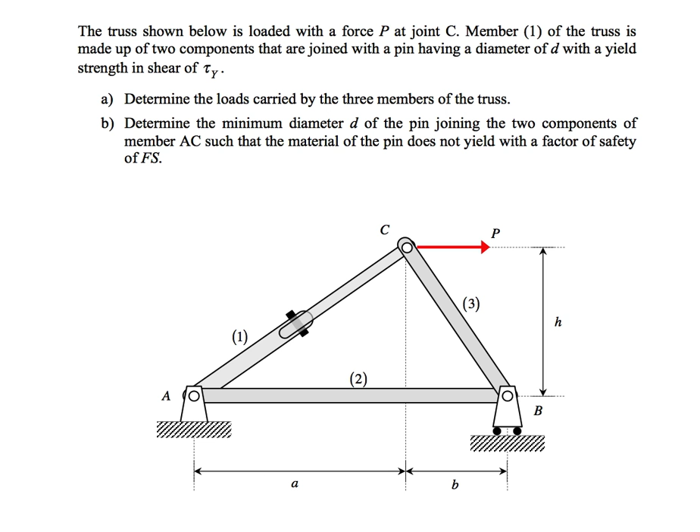And 2, we want to look at the minimum size of this pin D that holds together the two subsections of 1. And we want to size that in a way that with a factor of safety of Fs, this pin will not fail in shear in yielding. So again, we want to have a factor of safety against that failure.

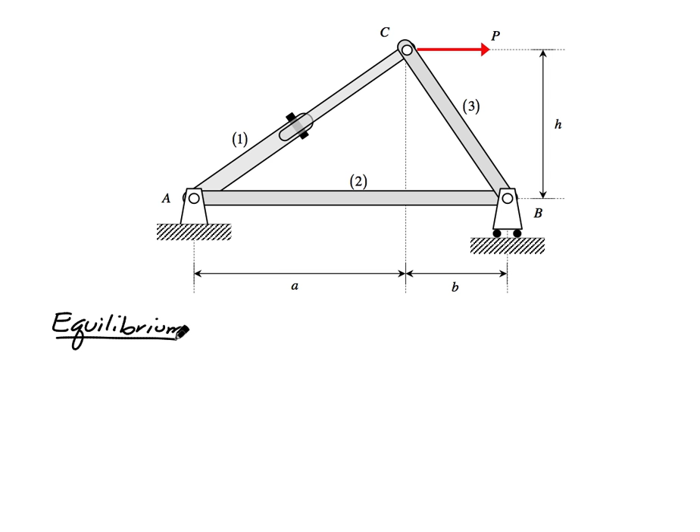So the first thing I'm going to do is look at equilibrium. And equilibrium here means I'm going to be looking at method of joints for joint C and joint B. The forces that I have acting on joint C is the applied force P. There is a force there, load F1. There's a load of F3. There's going to be a load exerted by member 2 on that pin, and there's going to be a roller support here, so there's going to be By.

So we can deal with trig. This angle phi. We'll say that phi is going to be given to us in terms of the dimensions of the problem. So that's going to be inverse tan of opposite, which is h, divided by adjacent, which is b. So that's known information. And how about this one here, theta? Theta is going to be also given by an inverse tan of h, in this case, over a. So again, these two angles we know from given information.

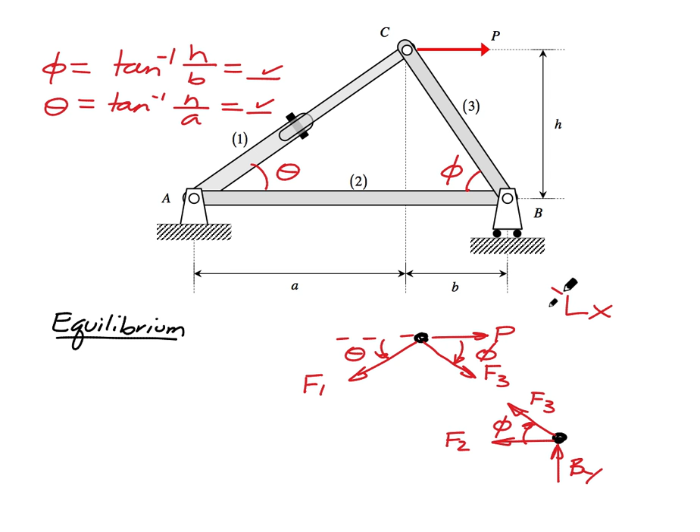This angle is theta. This angle is phi. Likewise for here. X is going to be positive to the right, Y is going to be positive up. So if I look at pin C, if I sum forces in Y first, I get minus F1 sine theta minus F3 sine phi. For equilibrium, that is 0. So I get that F3 is equal to minus sine theta divided by sine phi times F1.

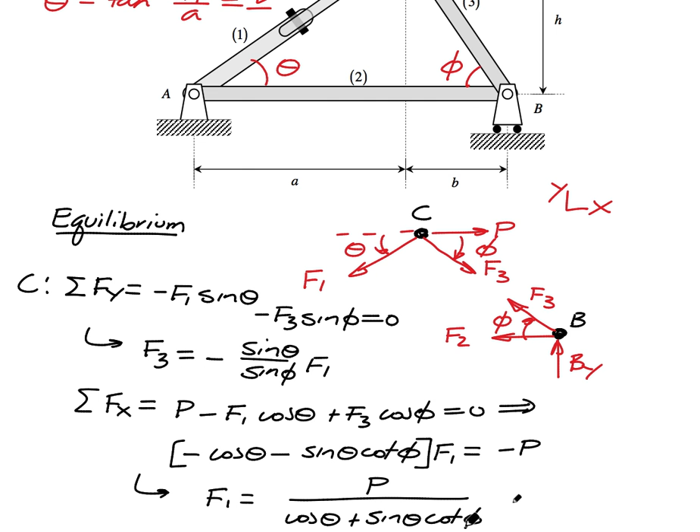Summing forces in X, I get minus F2, oops, I've jumped down to the wrong FBD. Let's stay with C here. Summing forces in X, I get P minus F1 cosine theta plus F3 cosine phi. For equilibrium, that resultant is 0. So what I'm going to have here is minus cosine theta minus sine theta cotangent phi times F1, and that's going to be equal to minus P. Making sure that I've got everything correct here. So it says then that the load carried by member 1 is going to be P divided by cosine theta plus sine theta cotangent phi. So this gives us the load carried by F1.

Also, therefore, from above, F3 is going to be minus sine theta divided by sine phi times F1, so that's times P divided by cosine theta plus sine theta cotangent phi, like that. So this will be F3. For what it's worth, F3 is in compression where F1 is in tension.

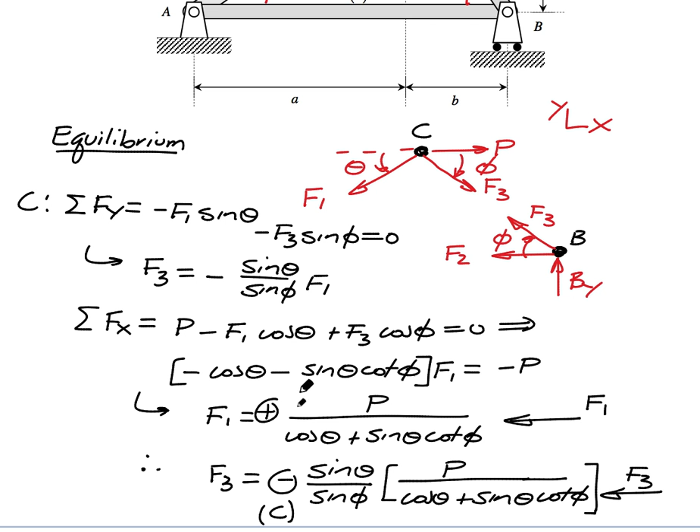From our free body diagram of B, when I sum forces in X, I'm going to get minus F2 minus F3 cosine phi, and therefore from this I get that F2 is going to be equal to minus F3 cosine phi, so that's going to be plus sine theta cotangent phi P divided by cosine theta plus sine theta cotangent phi. And so this answer here for F2 has a plus sign, so it means that that is in tension. Okay, so that gives us our loads carried by the members 1, 2, and 3.

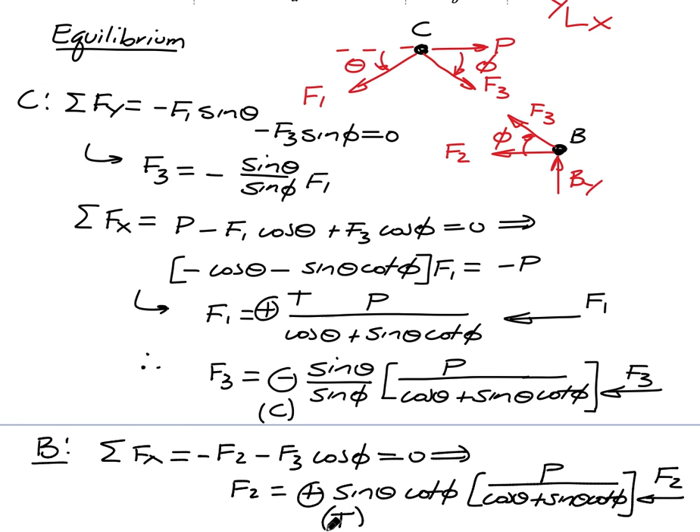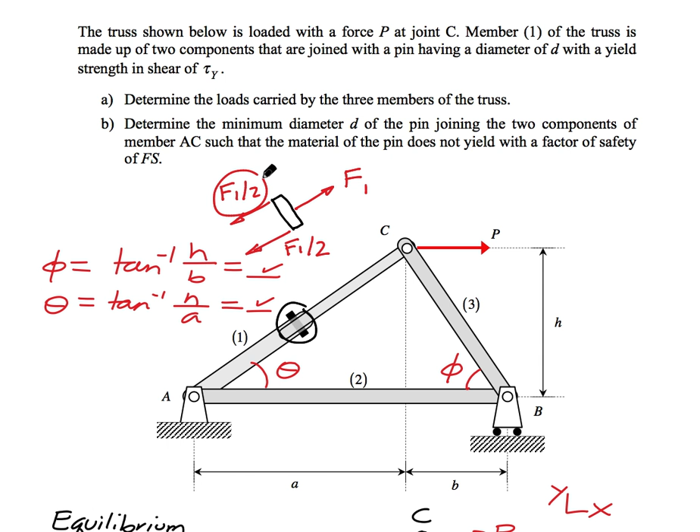Now we want to come up and look at the pin, this pin right here. And let me just make a sketch here. If I look at this pin, on this side we're going to have a double-sided connection. On this side we have a single. So this is going to be equal to F1, and then each one of these is half of that, F1. So what dictates the shear stress in the pin is the F1/2. That is, our shear stress is dictated by this because it's supported by 2 points.

So when I scroll down here, the shear stress in the pin is going to be the shear force divided by pi r squared, so that's pi times d over 2 squared. V in this case is F1 divided by 2. That gets multiplied by 4 coming from the bottom there, pi d squared, like that. So that's the shear stress we have in the pin. Let's take it one more step. That's 2F1 divided by pi d squared.

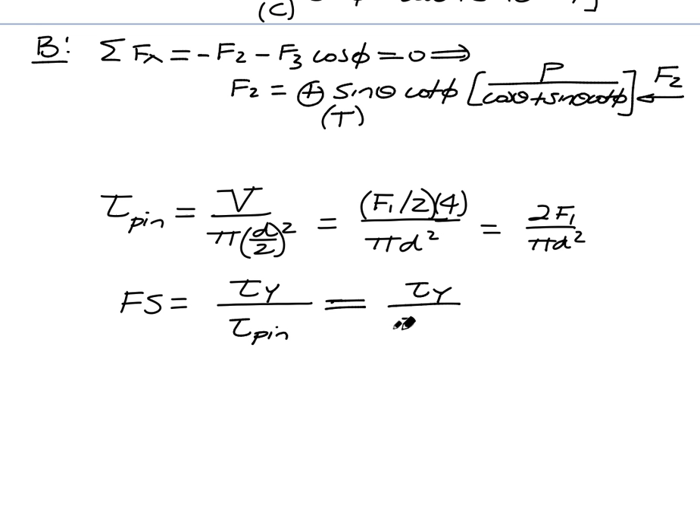We know from our factor of safety equation that that's going to be the shear stress that we're going to design against. So that's tau yielding compared to the stress that we actually have, tau pin. So that's equal to tau yielding divided by 2F1 divided by pi d squared. So let me take a couple more steps here. Pi tau y d squared divided by 2F1.

So the minimum d that we'll have for that factor of safety that's given is going to be the square root of 2 times F1 times factor of safety, divided by pi tau y. So that's the minimum diameter pin that we can have.

The first part of this is very basic stuff, what you have done before in other courses. Find the load carried by each member in the truss. I use the method of joints. But here we're given that member one is actually two members that are spliced together, held together with this pin, and it's a double-sided connection.

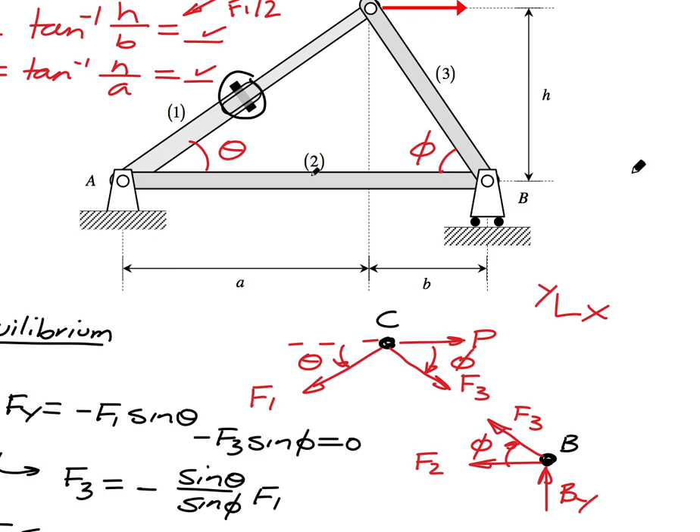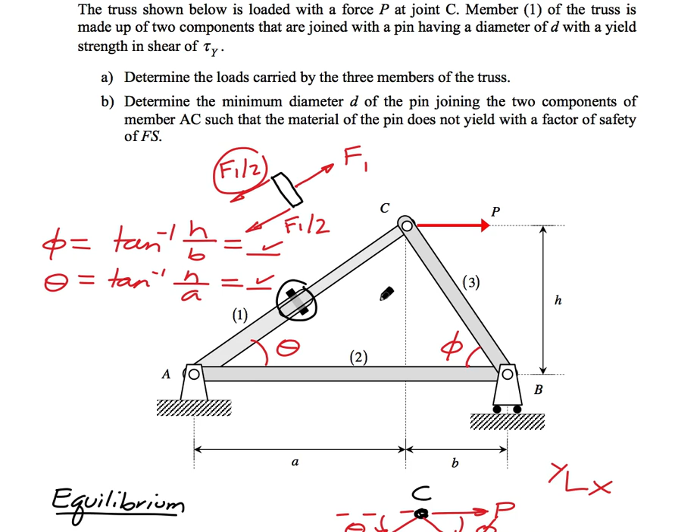So the load that's carried by that member there, F1, half of it goes on one side and half of it goes on the other, and that half is what dictates the shear stress in that pin. And so that's from where we get this. And then lastly, for our design, we want to use a given factor of safety to back out what minimum diameter pin that we can have and still have that factor of safety.